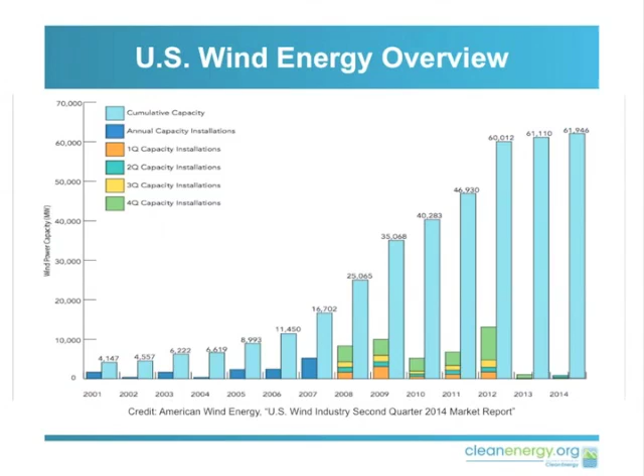Here's a quick chart showing how wind technology has been rapidly expanding across the United States. Even a decade ago, we were about a tenth of the size of what we are now. We've increased the amount of wind energy in the United States tenfold since 2004. And if you'll notice, we've had a bit of a hiccup since 2013 due to bickering in Washington, D.C. over a stable policy for wind energy. I just want to note that wind energy is one of the few energy resources that emits no air pollution, consumes no water, and has no fuel price. So there are a lot of benefits to wind energy in addition to it being a good job creator.

But what we've seen is that across the United States, wind development is predominantly happening everywhere except for the South. Here in the South, we do have one wind farm, the Buffalo Mountain Wind Project in Tennessee. It was partially constructed in 2000 and then expanded in 2004. We also have some new projects in Puerto Rico that were installed just a few years ago. But predominantly, the development is happening in many other parts of the country, not here yet.

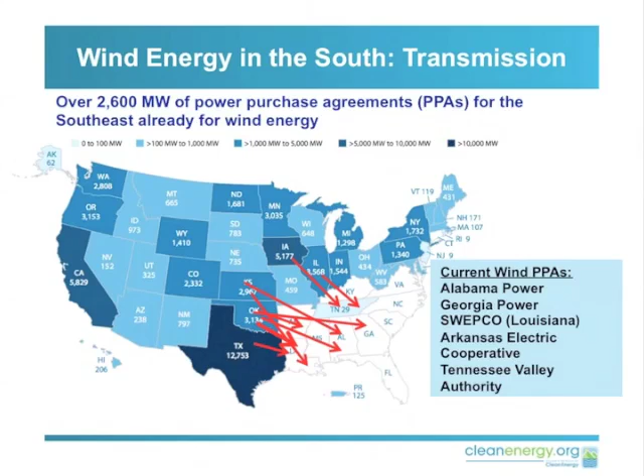But never fear, we are actually purchasing quite a bit of wind energy from other states. What happens is the utilities in our region are buying wind energy from these other states, and it's transmitted across transmission lines to get into our states. The unique part is that the states buying wind energy are typically doing it because it is the lowest cost energy option. States like Georgia and Alabama are not mandated to purchase wind energy like some other states, but the reason these companies buy wind is because it's the lowest price they can get out of any generation resource. So it's reducing utility customer bills, and it's also providing a good energy resource for these utilities.

Now, part of the reason why we wanted to talk about these new advanced turbines is because things have evolved pretty quickly over the past 5 years.

Two major differences are occurring: the turbines are getting taller and the blades are getting longer. This increases the output, the energy produced from a wind turbine. When you increase the amount of energy that comes out of a wind turbine, that lowers the cost and makes it more price competitive with other sources of energy.

Taller towers are capable of reaching better wind speeds. You may be standing on the ground and not feeling any wind at all, but if you look up in the sky, you may see clouds passing by. The clouds are passing by because the wind is greater at higher elevations than at ground level, for a variety of reasons. Some of it may be because there's a lot of trees where you are, or you're hiding behind a building. But the taller you can go with a turbine, the better wind speeds you can reach.

With the blades, as they get larger, they're capable of capturing more wind energy, and that means they can translate that energy in the wind into electrical energy through the generator. Think of it like a sailboat: a sailboat with a very small sail isn't going to travel very fast. But if you make the sails much larger, they'll capture more wind and can go a lot faster and further. So with these taller turbines and longer blades, we're seeing greater efficiencies with wind turbines, even from what we've seen 5 years ago, let alone a decade ago.

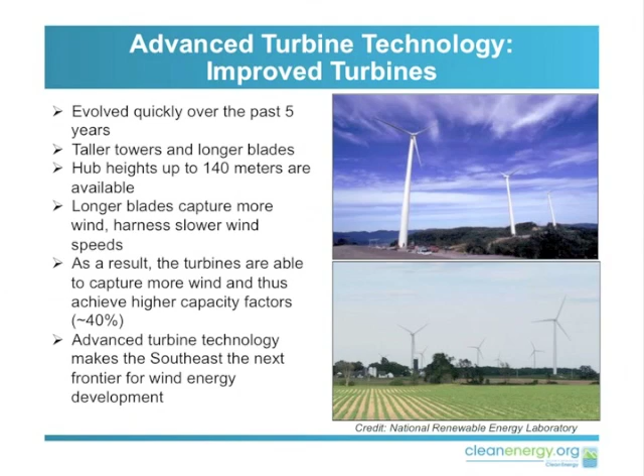And here's where the rubber hits the road. With the newer turbine technologies over the past decade, what we're seeing is that in lower wind speed areas, like our areas here in the South, the cost of wind energy has substantially declined using the newer turbine technology.

If you look at the little chart off to the right here, we've got two bars indicating a price from 2002 and 2003, and a different price in 2012 and 2013. This shows that wind speeds at 6 meters per second a decade ago cost about $90 per megawatt hour, or about 9 cents per kilowatt hour. But prices with the newer turbines have declined by about 39% in the past decade, making wind energy much more cost competitive in our region here.

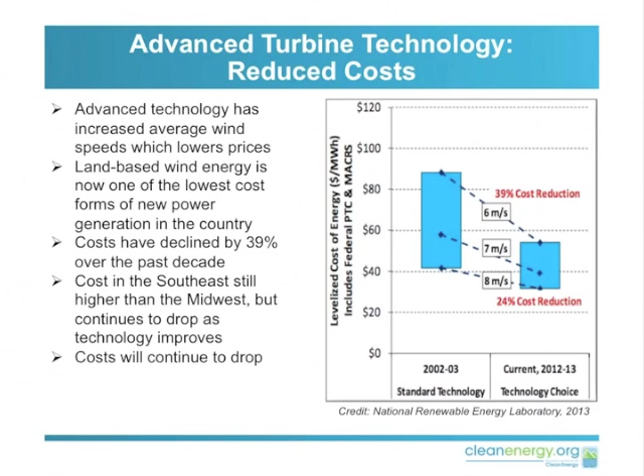Additionally, with the newer turbines, it's increased the amount of area that you can develop with wind farms. There are new estimates put out by the National Renewable Energy Lab suggesting we have substantial amounts of new wind energy potential that we didn't know we had before, in part due to the taller turbines, but also the longer blades. These are substantially larger figures than what had previously been estimated.

Currently, with the new Environmental Protection Agency Clean Power Plan, the new carbon rule, the EPA figures estimate a state like Mississippi has zero potential for wind energy. But with these new estimates using the new turbines, Mississippi actually has over 25,000 megawatts, that's 25 gigawatts, worth of wind energy potential, because the blades are getting longer and the turbines are getting larger.

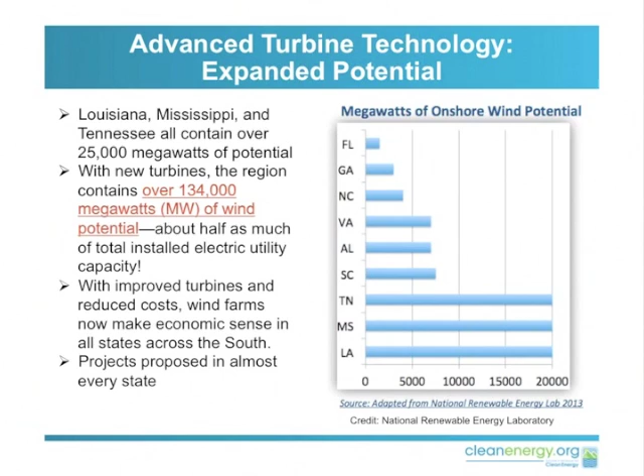Now, I want to pick on Florida here. If you look at Florida, you may say that doesn't look like an awful lot compared to the rest of the states, but the amount of wind energy that Florida may contain using these newer turbines is not small. It's about 1,500 megawatts, about the same amount of capacity as a nuclear reactor. So it's a substantial amount of renewable energy, and it only looks small because the rest of our states in the South have expanded their potential by such a great amount.

Part of the change we've seen is the difference between older turbines and newer turbines. The other factor to look at is the wind speed itself. I wanted to highlight how important wind speed is when combined with the newer turbines.

If you look at an older turbine, developers and utilities typically look at it in terms of capacity factors. So if you have a 1 megawatt wind turbine, or a 1,000 kilowatt wind turbine, with a 7% capacity factor, you multiply that 7% times 1,000 kilowatts to get an average of how much energy it generates every hour over the year. In this case, 7% times 1,000 would be roughly 70 kilowatts.

A 1 meter per second change for that turbine roughly doubles the amount of energy it would put out, and that's a pretty significant change. For folks on the English system, including myself, a 1 meter per second change is about 2.2 miles per hour. Just keep that in the back of your mind.

What you'll notice is that with the newer turbines, that same 1 meter per second change has a greater impact than it does for older turbines. An older turbine might double in the amount of energy it produces, whereas a newer turbine would increase by about 2.5 times greater. So it's a significantly greater output just based on a 2.2 mile per hour change, but it's not the same for each meter per second change.

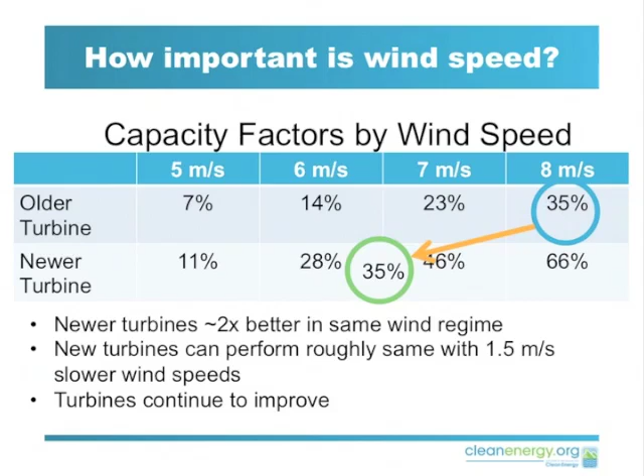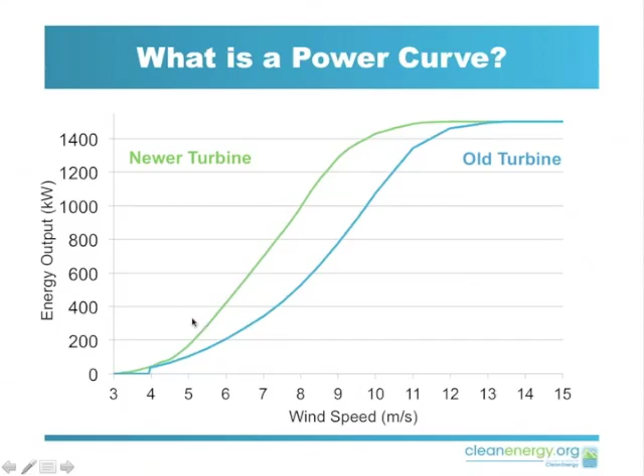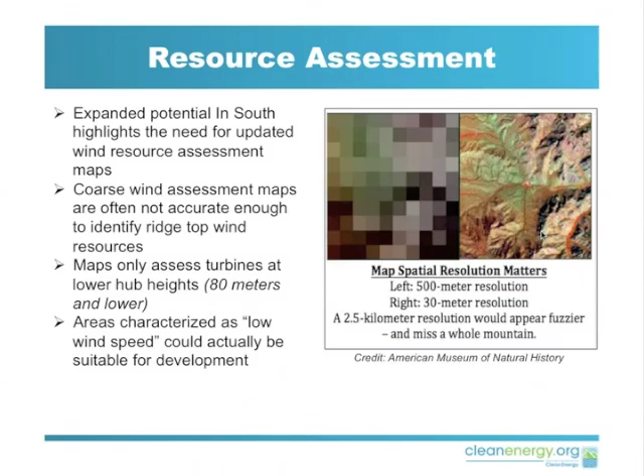So the gist of all this is that areas characterized as low wind speed right now, or undevelopable, may actually be suitable for development. It's in part because newer turbine technology is available, but also because better wind resource assessments are available to private industry themselves. With that, I've completed my portion of the presentation, and I'll be turning it over

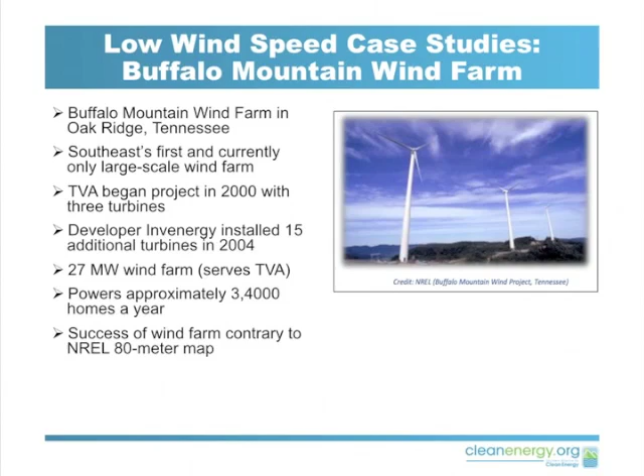What we found is it's been a really successful wind project. It powers approximately 3,400 homes a year. And the success of this wind farm, which we're going to go into the maps next, is contrary to what wind speeds we're finding from the maps.

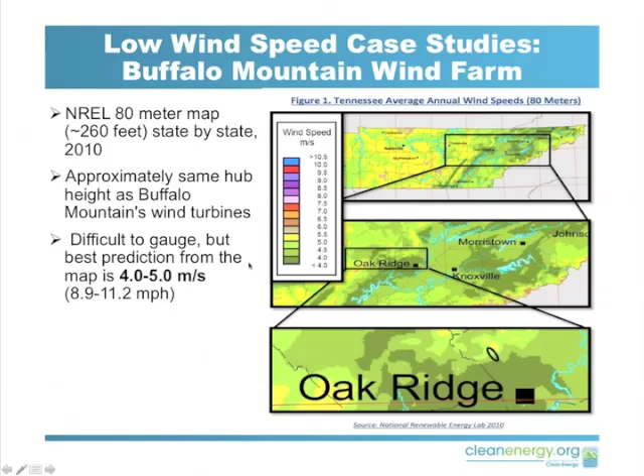While it's hard to gauge and determine, using the map and the color chart, the best prediction we could come up with is about 4 to 5 meters per second for average annual wind speeds. But let's take a look at the actual wind farm to see where we find the wind speeds to be. Luckily, we have data from Buffalo Mountain Wind Farm to see what it actually generated.

From there, we can work our way over to see what the wind speeds are. We found that in 2012, the wind farm generated 48,000 megawatt hours from these 15 turbines, each 1.8 megawatts. Simon did a great job explaining capacity factors, and we were able to break that down to determine a 20% capacity factor. The average hourly output would then be 360 kilowatts, since we took 20% of 1.8 megawatts.

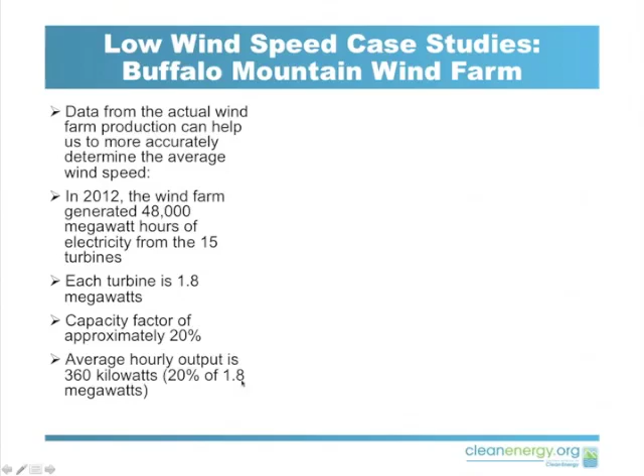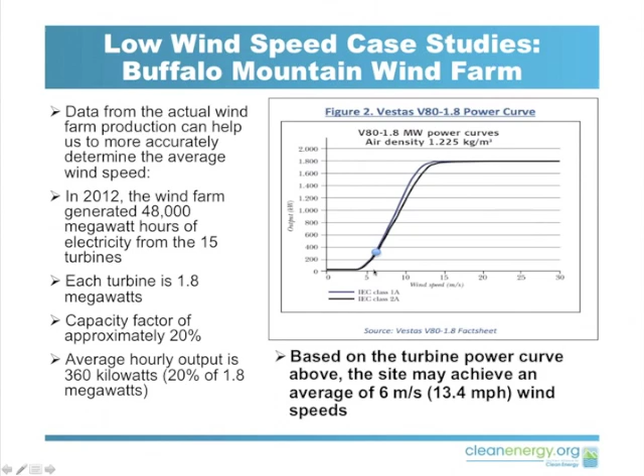As we already discussed, a change of 1 to 2 meters per second can greatly change the output the wind farm produces in a year. So let's look at what the NREL map was predicting. At 5 or 4 meters per second, going up to look at the output, it would place the wind farm at around 100 kilowatts, way below actual. Using this assessment, it might not even seem like a good idea to develop this wind farm, when really the capacity factor greatly increases from around 5 to 10%. So actual output is at least double what the map would predict.

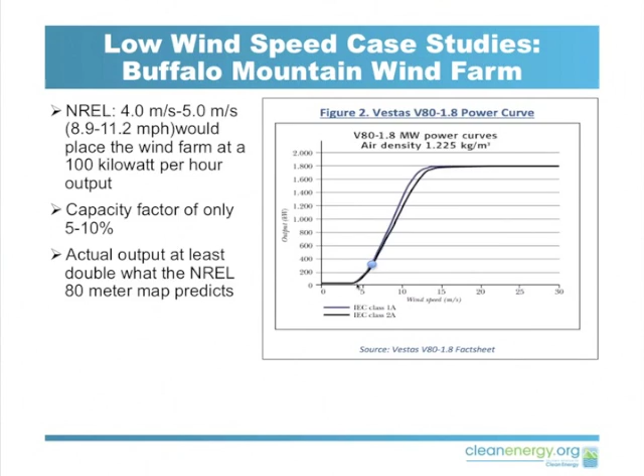Our next case study, let's go to Rhode Island. This is Narragansett Bay Commission's wastewater treatment plant. I actually had the chance to see these wind turbines about a year ago, and they're up and spinning and look great. These are 3 large-scale turbines installed in 2012, performing really well, producing 6,700 megawatt hours of electricity in the first year.

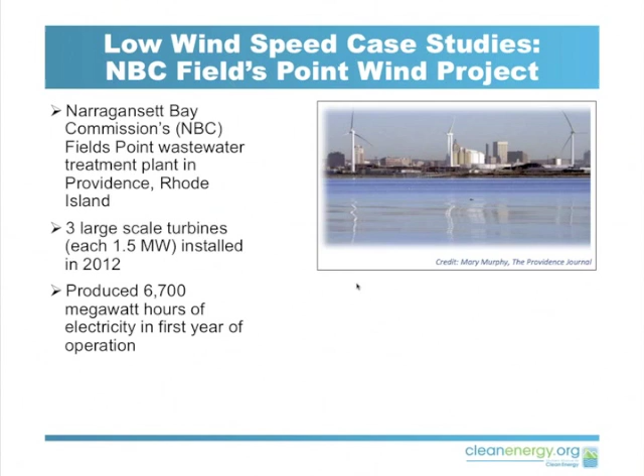But again, same thing as Buffalo Mountain, we have data from the wind farm on how well it did in its first year, looking at about 6,700 megawatt hours, and we determined a capacity factor of 17%. Each turbine is 1.5 megawatts, so we can figure out what the average hourly output is, which we found to be

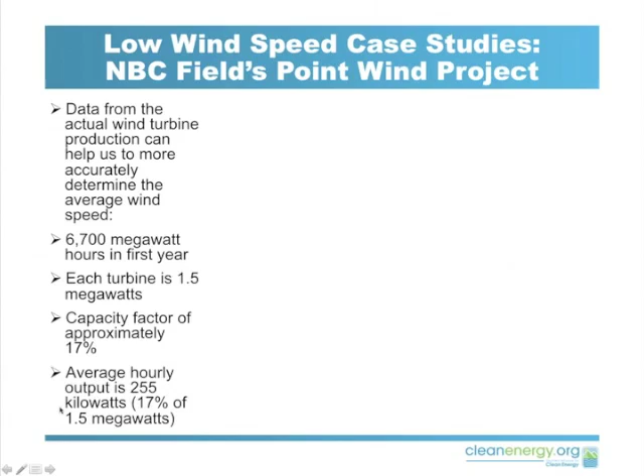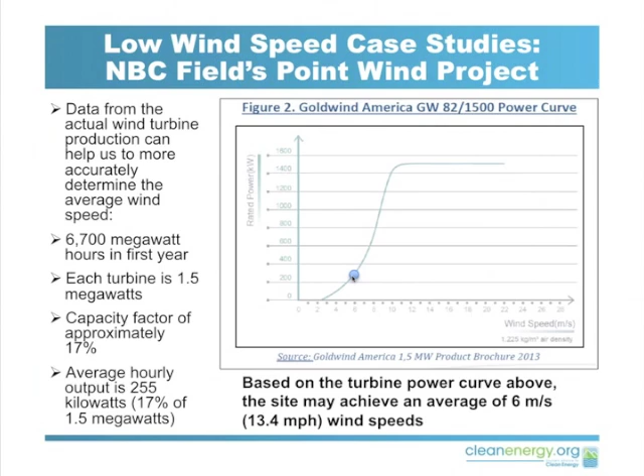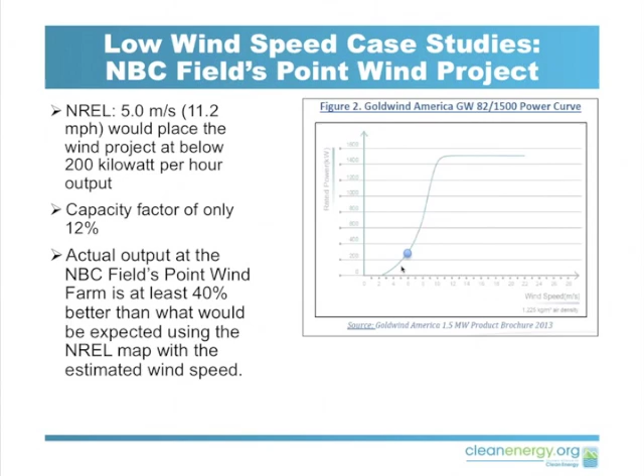255 kilowatts. So let's take a look at the power curve again. If we're looking at 255 kilowatts and we come over here, we're looking at about, we'd say, an average of 6 meters per second. So same story: with the NREL map at 5 meters per second, it's going to produce well below 200 kilowatts, much less capacity factor. So actual output at NBC Field's Point Wind Farm is at least 40% better than what you'd be able to predict just using the map.

This next case study, we're looking at Puerto Rico. It's a little bit different. We looked at 2 different wind farms, and we weren't able to find as good information about how much these wind farms produce, so it's a little more anecdotal evidence. But we'll still be able to show you how much better these wind farms are doing than what you might be able to assess from the map.

The first wind farm is Finca de Viento Santa Isabel. Both of these are fairly new; it began in 2012. We're looking at 44 wind turbines with a total capacity of over 100 megawatts, developed by Pattern Energy. The second is Punta de Lima Wind Farm, which began in 2013. A little bit smaller, but with 13 turbines, and both of these are up and operating.

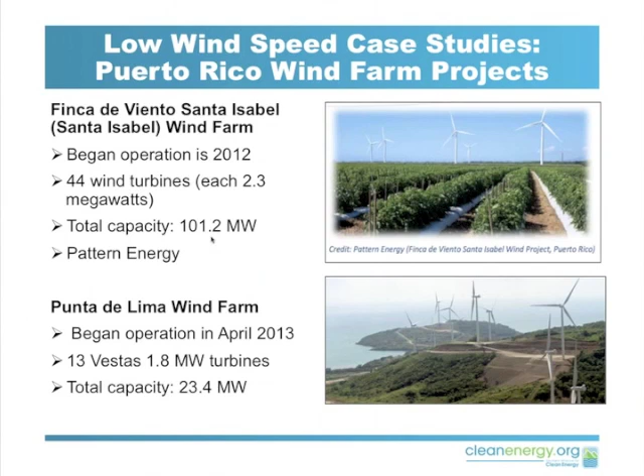So let's take a look at the map again. This one is a little bit different. It's a much more outdated map, only at 50 meters, while these turbines are much closer to the 80-meter hub heights. And the wind power classification system here is much more broad, so it makes it hard to gauge what the average wind speeds would be.

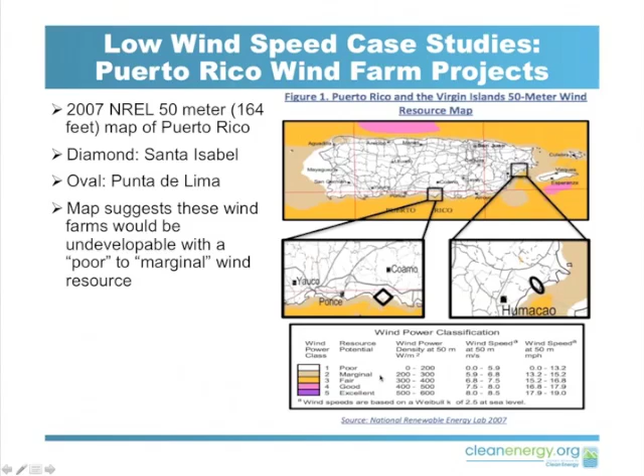If we look over here, it looks like it's in the white area. Just for reference, Santa Isabel is the diamond and Punta de Lima is the oval, but they're both in the white area, which says it could be anywhere from 0 meters per second, making it purely undevelopable, to 5.9 meters per second. So this suggests these could be undevelopable with poor to marginal wind resource.

With the Finca de Viento Santa Isabel wind farm, we couldn't find actual information about how much it produced in a year, but they did initial studies before the wind farm was constructed, which we find is what really needs to be done - a 1 to 2 year study of the wind speeds. They reported an average wind speed of 6.5 meters per second.

With the Punta de Lima wind farm, we found that the developer said the wind farm will generate 52 gigawatt hours per year. So let's try the power curve and see what that shows us with the wind speed. Each turbine is 1.8 megawatts. We found a capacity factor of 25%. 25% of the 1.8 megawatts would put us at 450.

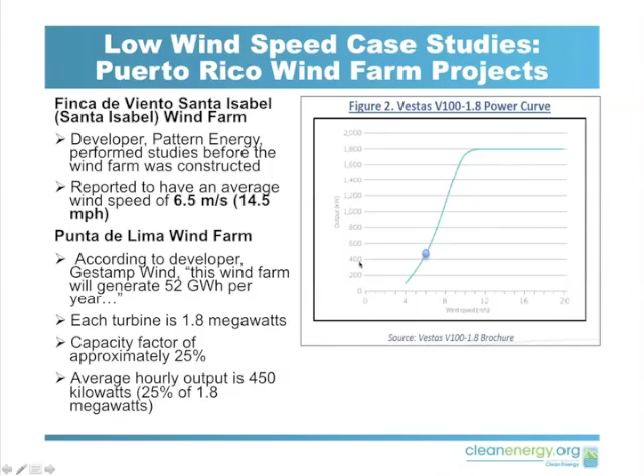Let's take a look. 450 would put us at about 6 meters per second wind speeds. So the summary from these two wind farms is that the average annual wind speeds are approximately 6 to 6.5 meters per second, which is so much better than what you can gauge from the map.

And also imagine the potential. Simon talked about advanced turbine technology with taller hub heights - this could really produce even better potential for Puerto Rico. We found a new, more advanced NREL report on the U.S. Virgin Islands that recognizes that some of these areas could achieve wind speeds of 7 to 7.5 meters per second.

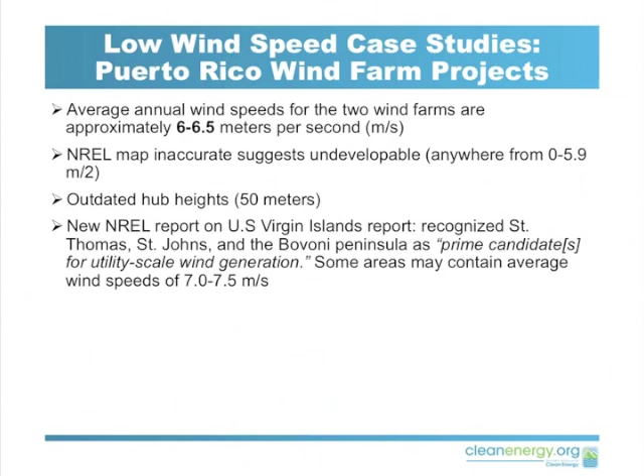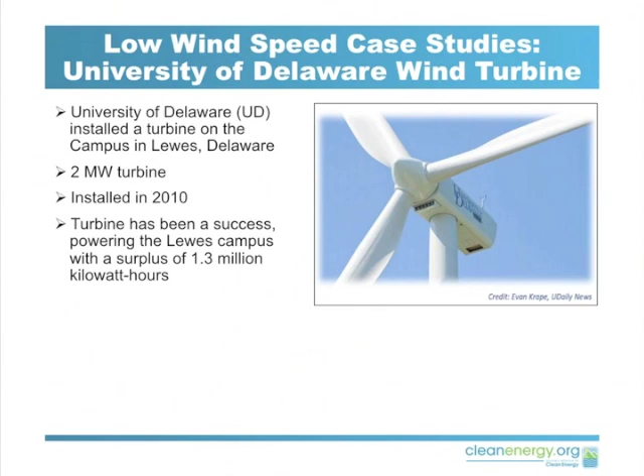So our next case study is at the University of Delaware. They installed a 2 megawatt turbine on their campus in Lewes in 2010, and this turbine's been a great success, powering the campus with even a surplus of energy.

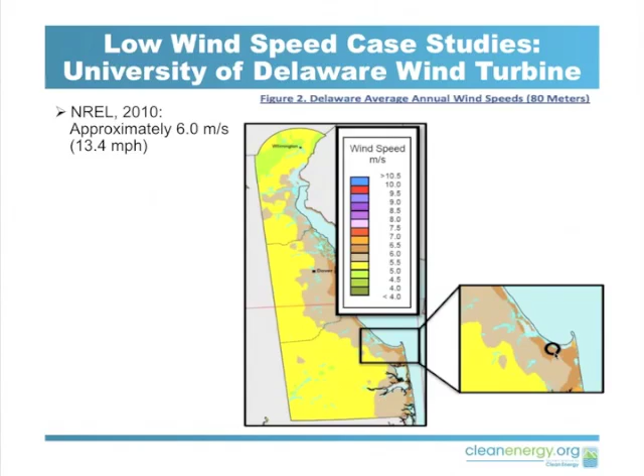Before the University of Delaware decided whether they wanted to construct this wind turbine, they conducted a feasibility report in 2009, which shows how crucial it is to really go and do on-the-ground measurements beforehand. They looked at 80 meters and found that it would achieve approximately 6.74 meters per second.

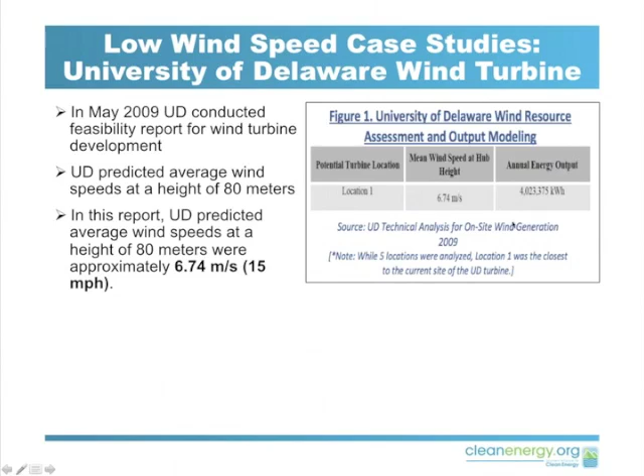Here's information from the report that they did, which you can access online, and they also assessed what the annual energy output might be. So they moved along with developing this wind turbine.

Again, we have data that can help us determine what the actual wind speeds may be. The report they put out found that in about a year, they produced 5,100 megawatt hours of electricity, which is even better than they had estimated from the report the year before, giving them a capacity factor of 29%.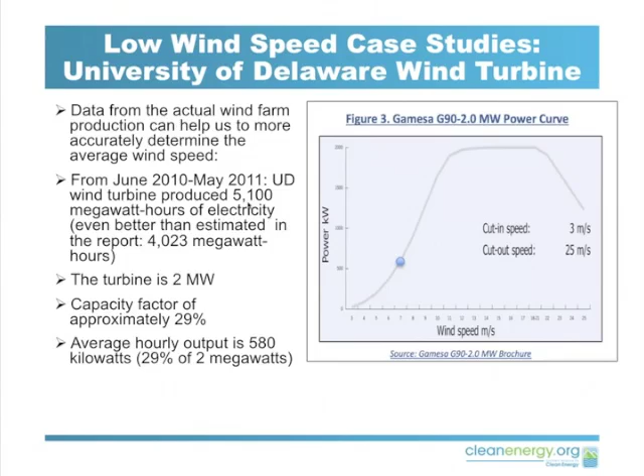So let's go back to the power curve again. We're looking at 580 kilowatts, and we come down at about 7 meters per second. Same story - we're looking at just a 1 meter per second difference, but it makes a huge difference on the amount of electricity you can produce in a year.

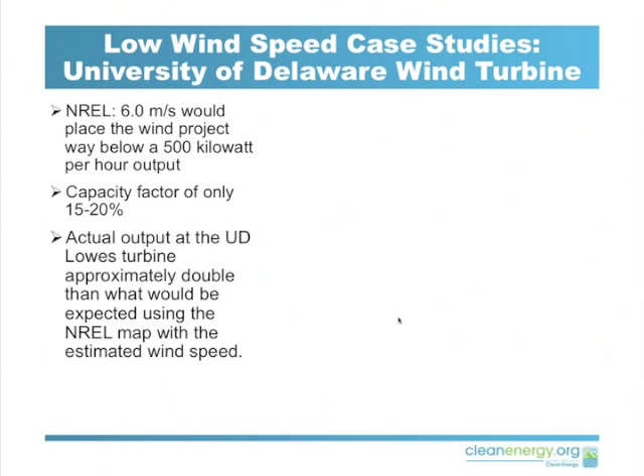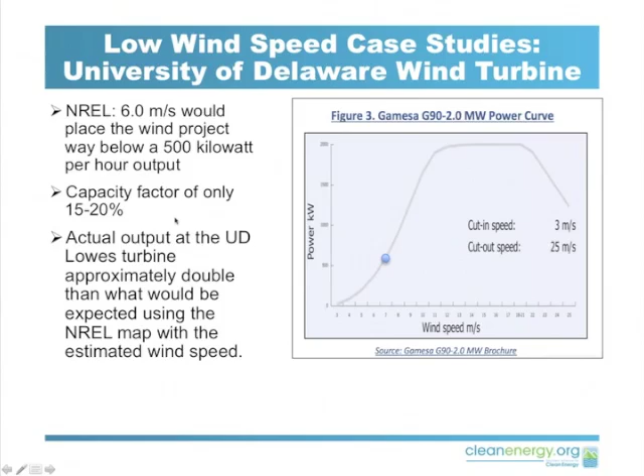So if we were looking at closer to 6, you can see what the production would be from the wind turbine - the capacity factor would only be 15 to 20%. So the output was about double what we could predict from the map.

So here's our last case study. It's a little bit more unique - we're not actually looking at turbines, but this helps us look into the future at advanced turbine technology. I think it demonstrates the Southeast opportunity with new turbines and shows a better idea of what's needed to do an extensive on-the-ground study before developing a wind farm.

So AWS Truepower performed an extensive study in 2011 on Arkansas's wind resource. They used 5 different communication towers ranging from 90 to 120 meters for wind monitoring, and were then able to estimate long-term mean wind speeds.

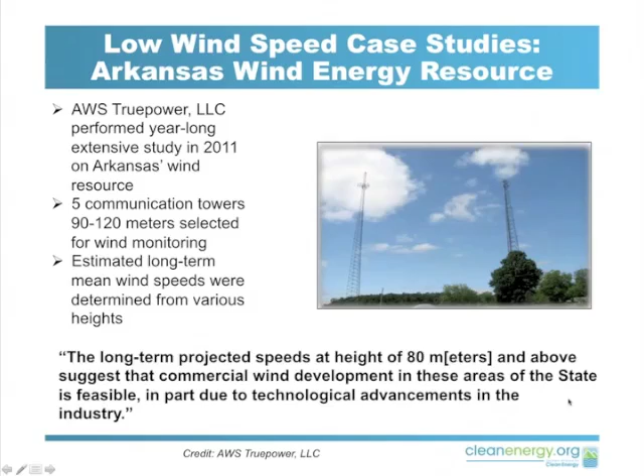One of the big takeaways from the report: they found that the long-term projected speeds at a height of 80 meters and above suggests that commercial wind development in these areas of the state is feasible, recognizing the technological advances in the industry. So here is the study that AWS Truepower performed.

If you look over here, these are the 5 different towers that they used to get the wind speeds. And this is the big takeaway: they look at 80 meters, and that's the one that NREL is using for the maps. But they also look at 100, 120, and 150.

And you can see the change in the meters per second. It might just go up half a meter per second, 1 meter per second, but now we understand from looking at the power curves how much more electricity can be produced.

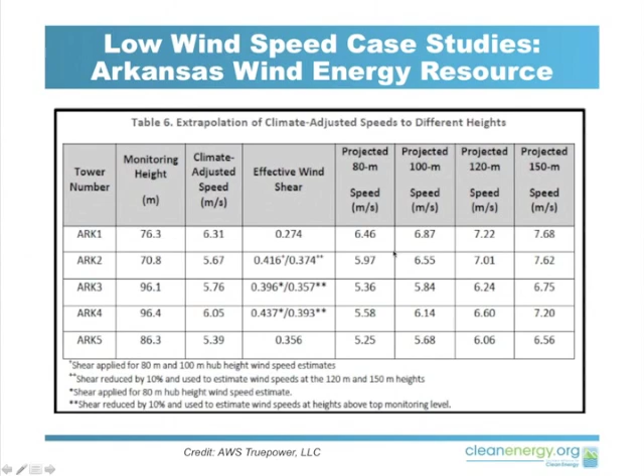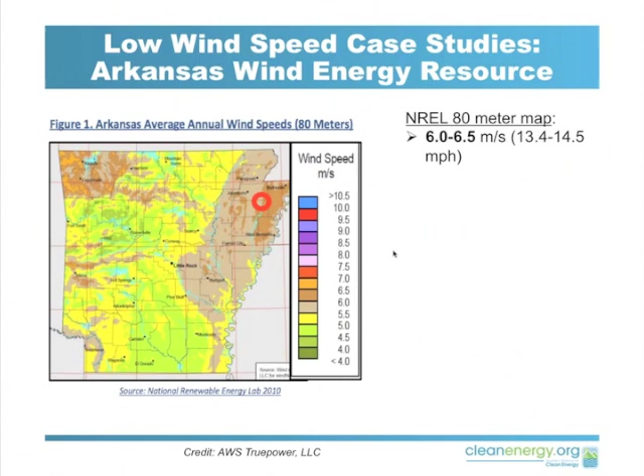So let's look at this map one more time. I just picked one of the towers so that we could look and compare. So this is the ARK1 tower. And from looking at just the NREL map, we would be predicting about a 6 to 6.5 meters per second average wind speed.

Here again is the chart that we looked at earlier, and we're looking again at ARK1. So for about 80 meters, we're looking at 6.46 meters per second. So this is actually about in line with what NREL was predicting.

But let's look at 100, 120, 150. As you can see, the meters per second greatly goes up, and it really changes the production.

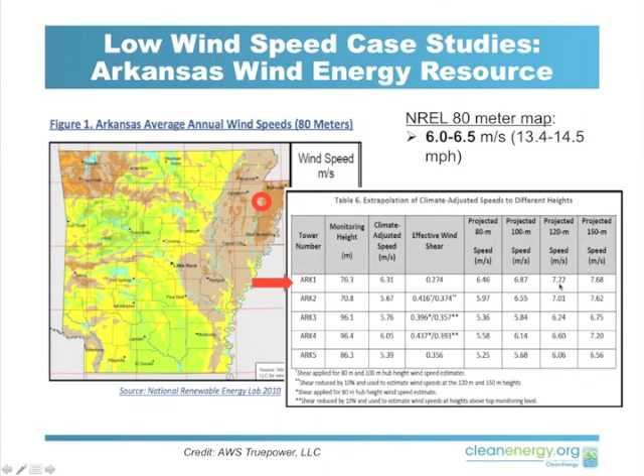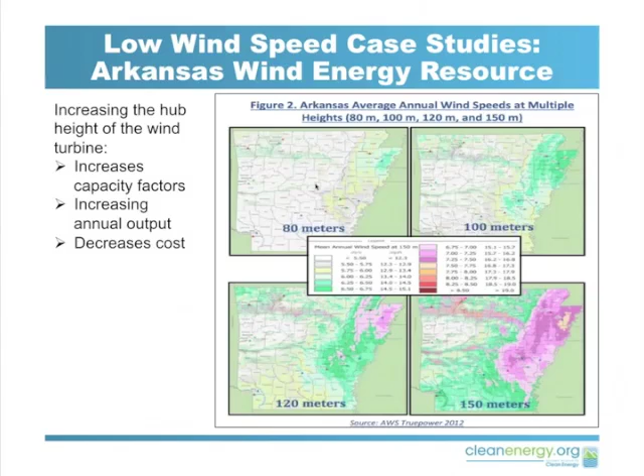So you can really see how much more resources open up and the opportunities to develop wind farms if we increase the hub height with modern turbines. So increasing it increases capacity factors, as we've seen, increases annual output, and most importantly, decreases the cost.

So conclusions and takeaways from this report: as Simon greatly highlighted, advanced turbine technology has allowed for greater capacity factors and lower costs. And now with new modern turbines, there's 134,000 megawatts potentially available throughout our region. With these new turbines, there's a need for wind resource maps that better reflect these opportunities.

And we can't just use wind speed maps alone. They can be used to initially assess a site, but we need to go in—that's why developers go and do an extensive 1 to 2 year study on the ground.

The big issues with the maps: first, as Simon explained, they're too coarse to identify ridge resources that might have pockets of really good wind speed. And for the Southeast in particular, they're outdated, only with 80 meter hub heights.

And the case studies have shown, as we've said, that 1 meter per second difference in average annual wind speeds makes a significant difference in the electricity that can be produced in a year. And lastly, the majority of the case studies that we found showed that turbines produce double what would be expected from the maps.

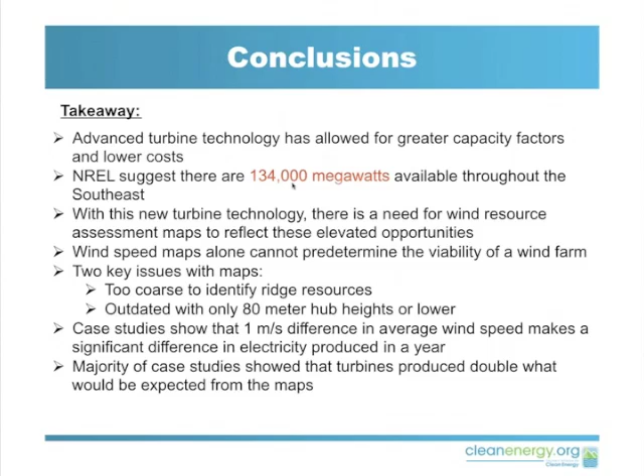So I think that concludes the report.